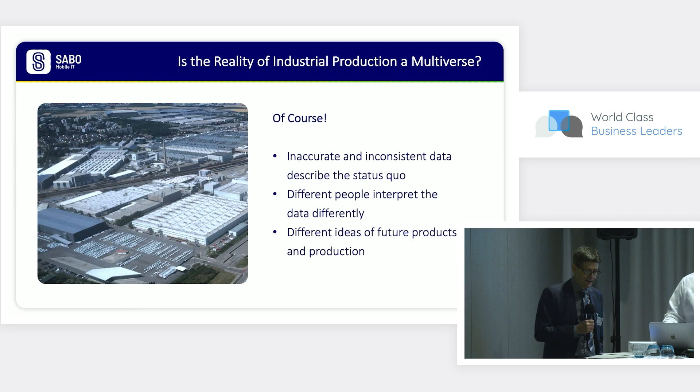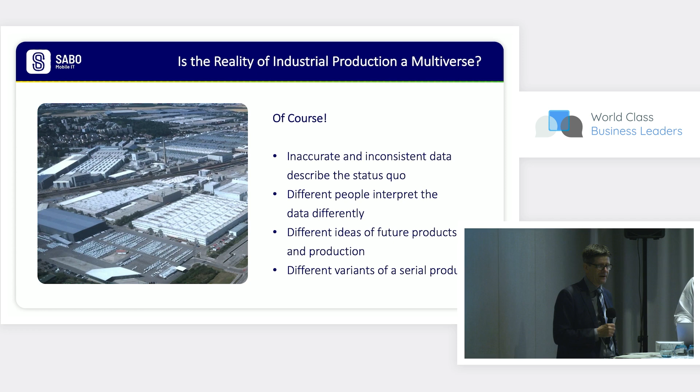So is the reality of German car producers a multiverse? Of course, even a German car producer doesn't have fully accurate and consistent data to describe the status quo. Different people interpret the data differently, and there are different ideas about the future products. And of course there are many different variants of serial products, meaning you can buy the car in so many variants as there are seconds since the beginning of this universe.

So what are the real challenges? Well, the challenge for planning such products is that innovation cycles become shorter, and people want more individual products. This means if you want to be competitive, you have to plan fast and accurate to have a production which is cost efficient. And if you're in a huge corporation with different IT systems, where you have to coordinate different responsibilities of different people, and where you need a system which keeps transparency so that you don't have to reinvent the plan for a production again and again, then these are the challenges we are coping with.

And the task for us, for SABO Mobile IT? Well, we had the task to develop a system to handle the end-to-end process across the data of several legacy systems. We had the task to develop a tool which allows communication between different people to document their work. And we're speaking of one of the largest car manufacturers, Volkswagen, in the world, so they have quite a lot of data. They have a huge amount of users, and they needed a system which is performant and fast. Now all this could only be accepted if it is user-friendly, if the people accept this software and if the software is able to help and assist them.

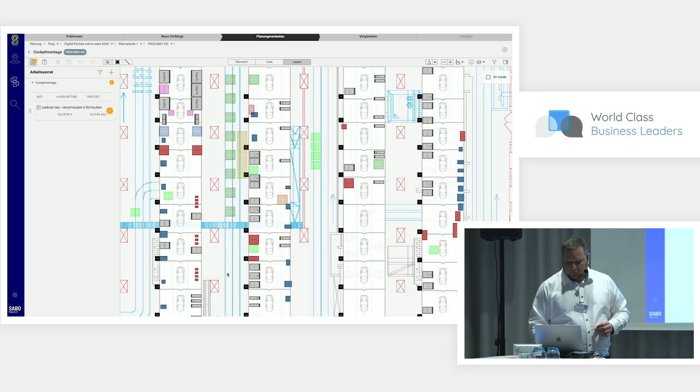Let's create a new one, enter the system, and try to clock the new working step in. The view switches to a 2D layout of the complete production hall. Here again we can see the belt sections. Zooming to the proper place in the production allows me to select the working place.

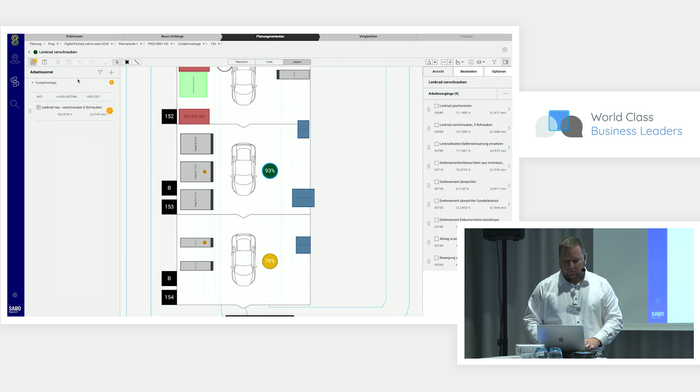All the same information I presented before is available here again. So what we do now is clock the old one out simply by drag and dropping, and clock the new one in. But the new one takes more time—sure, 6 bolts instead of 4 will take more time. Let's try it.

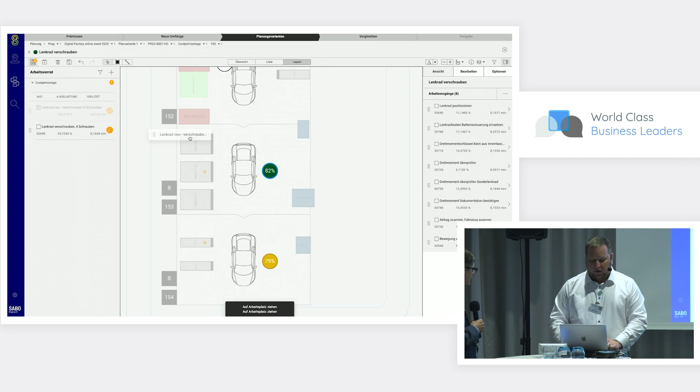This again is an assist functionality for the planner—he can try it out. At the bottom you see it does not fit anymore, it's red if you can't see it. But let's try to clock it here. And as you can see, it fits in.

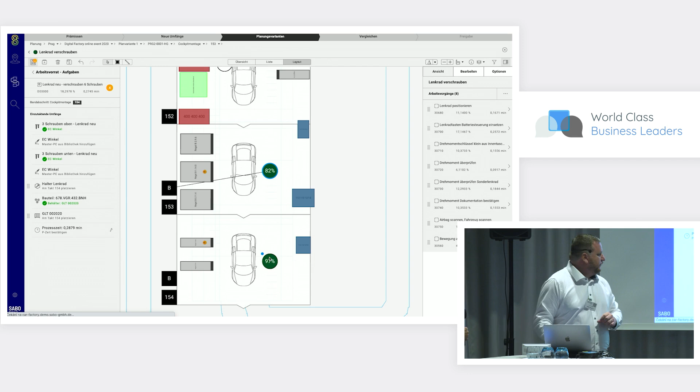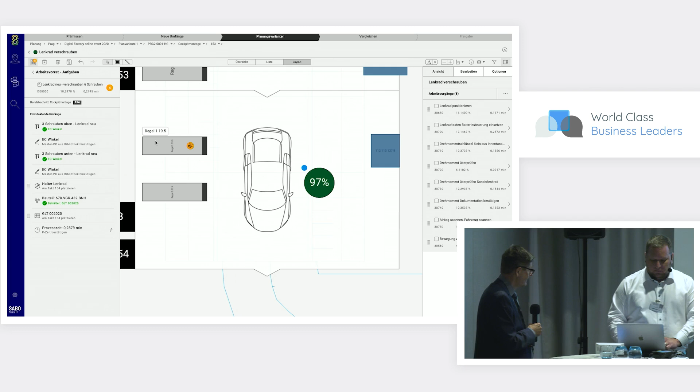The utilization recalculates and the system creates the specific tasks for this working step to be accomplished by the planner. He needs the material, we need the tools. Exactly. So let's gain some space on the cycle.

I see the shelf on the left side. These are the shelves, this would be a holder, a handling machine. This is the steering wheel in a large load carrier, and we confirm the timing of the production step for simulation purposes.

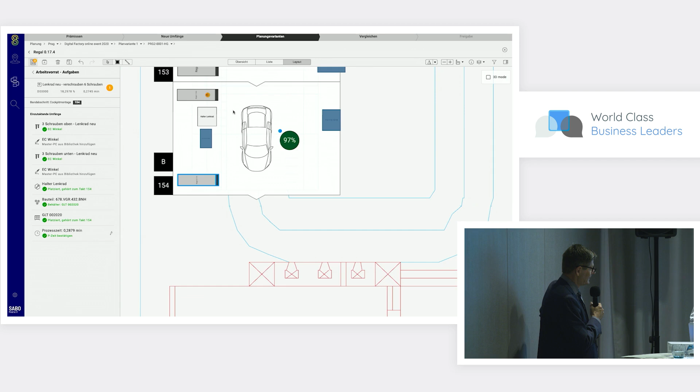And one last step, I don't want to bother you with. All right, okay, so you've done all this. Now it looks like a sketch, a schematic picture. Is it really the real data?

No sketch—this is CAD perfection in the browser. You can even measure the distances to your objects here. So we are really scaled to reality.

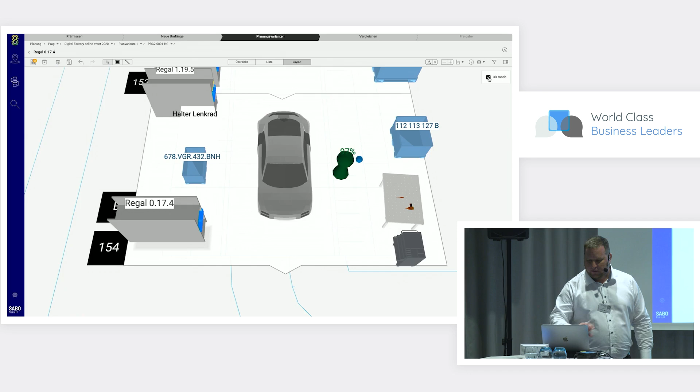Now we've seen it as a map. Wouldn't it be handy to see it also in 3D? Of course it would be. The magic button allows you that—switch the view to a 3D mode of the application, and let's have a look at the shelves, at the complete line.

Oh, I see—there's a lot of data. You are now, in fact, zooming and rotating at the same time.

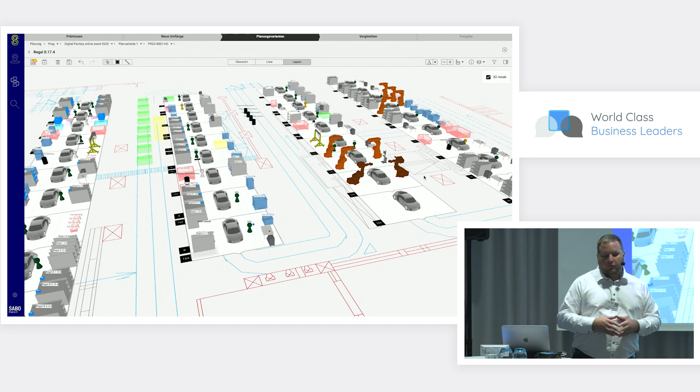Can you really handle that amount of data for a large production site? This is pretty small—we have production halls of 50,000 square meters running in the browser in 3D mode, and you can still move freely. So this is our signature dish, the 3D layout.

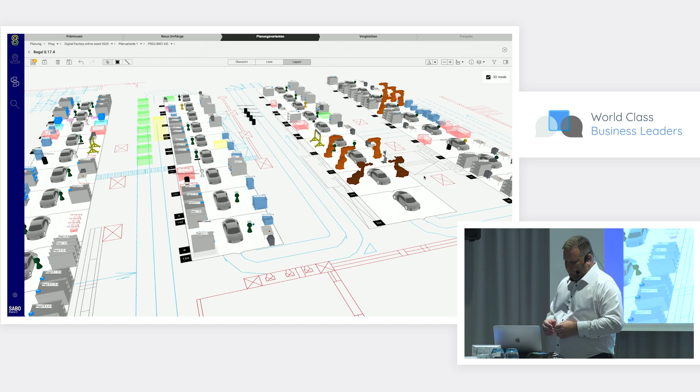And this would work also on a tablet when you're on site, so that you can check inside the plant. And the tablet, as I know, also allows you to see things in virtual reality, so you can compare the variant against the reality.

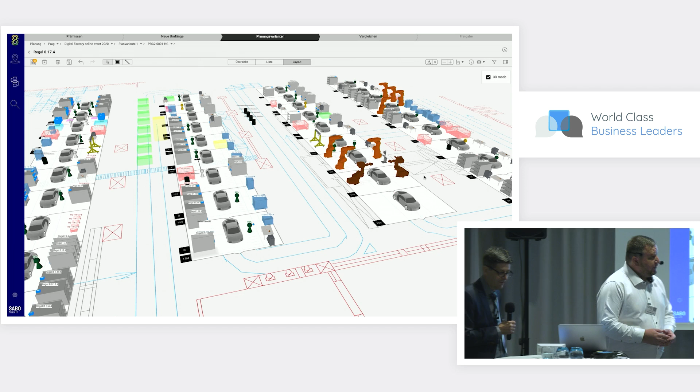Now, if you would summarize, what have been the main success factors of this application, which is now applied by Volkswagen? From the planner's point of view, I'd say the main feature is that he has all the information from the legacy systems in one place. From the technical perspective, it's a very performant and quick browser-based, cloud-based application—scalability and performance.

And the third main feature is the user experience. It's custom-built for the needs of planners. It's a design award-winning application, and it serves its purpose.

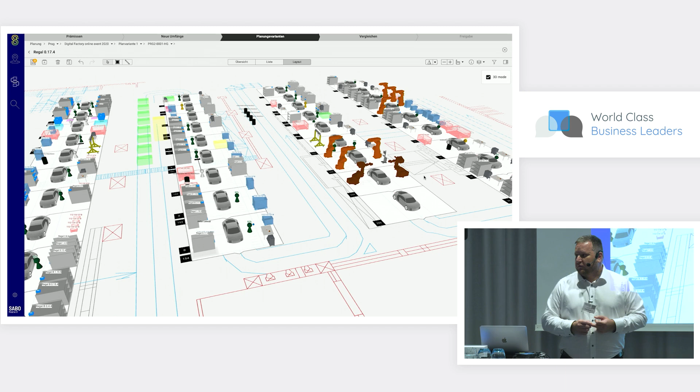All right, so this was an insight. This is one application, an example of what is possible if you take a hands-on approach and solution-oriented thinking rather than a complicated one. And I believe there are a lot of other ideas which we can implement for Industry 4.0.